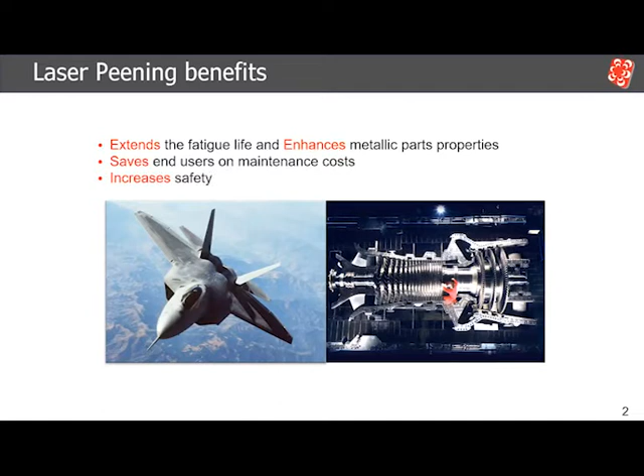So today in my talk, I will start with explaining what the materials team at LSP Technologies does, all the cool stuff we work on. Then I will move on and explain the basics of the laser peening process. I know a lot of people come from different backgrounds, so I wanted to have the same foundation for everyone moving forward.

Then I will move to the core of this presentation, which is the material properties enhancement, and digging into the technical basis of how we're getting that material enhancement from laser peening. I will end with quick closing notes and, of course, open the floor for your questions.

So starting with the material group at LSP Technologies, as Jeff explained, we've been working on a lot of projects around the world, and one of the projects is delivering laser peening systems, as you can see here, to China, Germany, and again back to China, and moving forward, hopefully in Russia and other countries.

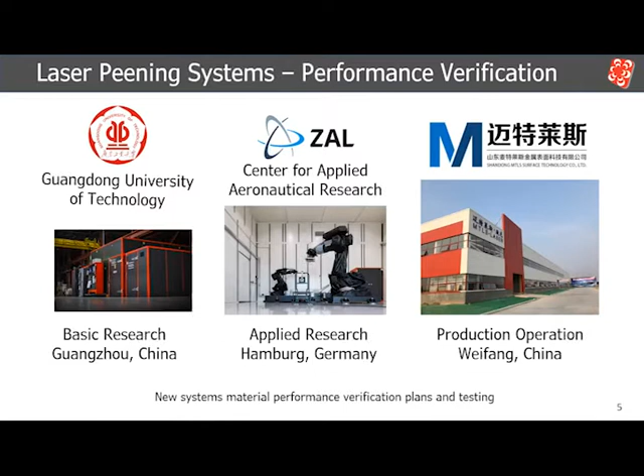The materials team responsibility when it comes to laser peening systems, to our Procudo 200 laser peening system, is ensuring the performance of that system, making sure all our systems are up to performance and meet all the requirements and are able to deliver the best laser peening performance from our processing.

The second task that the materials research group does is, with all the new expansion of our projects and going to applications pushing the boundaries of laser peening, as Dominica explained and others will be explaining in the next few talks, the materials team's responsibility is to work with our engineering groups to ensure we are supporting all the new innovation, all the new designs, and making sure all these new products that we're delivering actually meet their customer requirements and deliver the best laser peening process to these new applications.

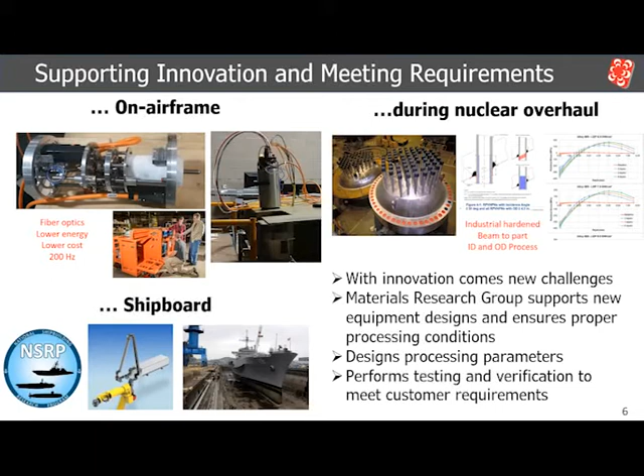Here at Dublin, we have our application development and production cell. On the application development, I'll explain a bit more about that process in the next slide, our duty is to interact with the customer, understand their problems, design laser peening solutions, and make sure to have proper processing to prove the benefits of laser peening.

On the production side, once they're happy and they want to have production, our goal is to identify the process optimization and boundaries for the process. And from there on is to ensure the quality assurance that every part that we're processing meets the requirements needed.

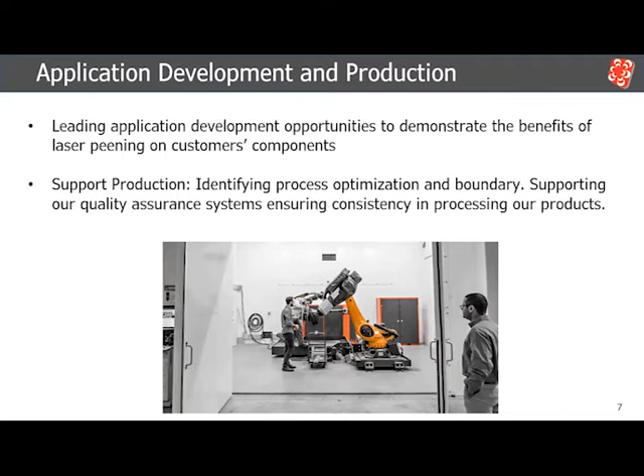Briefly about our development program for new applications, David Lahrman will be explaining and giving a lot of examples about this topic in his talk this afternoon at 4:25, titled The Path to Production.

The process mainly starts with actually understanding what the problem is. Laser peening is not a broad processing technology, meaning we need to know where the problem is in order to design a solution for that problem. That comes from learning as much as possible from the customer around the location of the failures, the type of the failures, the stresses, the environment being experienced by that component.

From there on, we move to our modeling part. Stan Bovid, Director of Materials Research, will have a talk around the modeling and all our work here at LSP Technologies. We use the modeling to optimize and tune down the number of parameters that we want to test to get the most optimum laser peening conditions for this part.

From there on, it's more of testing and verification. Testing can be done on samples or sample coupons, or on a small set of parts. Once the confidence is there and the customer is happy with the results that they received, that's when we move to production. And at that point, as I said, it's about ensuring that we get the best processing for each of the parts being laser peened.

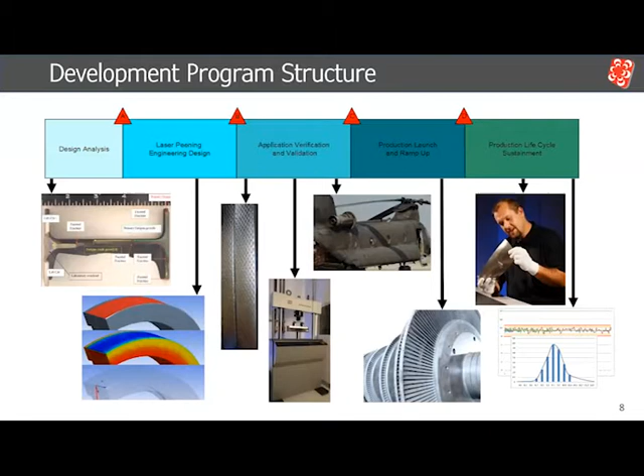So the final task that I want to talk about that the materials team does is research and development. We have a lot of topics that we investigate. The first one is pushing the boundaries of the laser peening process. As Alan showed, they have been doing science around laser interaction with materials since the 60s and 70s. But there's still a lot to push that technology forward. Stan Bovid, Director of Materials Research, recently published two papers linked to this.

The second type of research and development we do is developing physics-based, experimentally verified modeling capabilities. Stan, tomorrow at 1 p.m., will be presenting more about this topic.

The third research and development topic we work on is new applications. Jeff explained a bit about additive manufacturing and other applications he's excited about. Tomorrow at 2:30 p.m. Eastern Standard Time, I'll be giving an overview of laser peening for additive manufacturing.

So these are a few highlights of the talks and the research and work that the materials team does here at LSP Technologies. Now moving to the part where I will give a brief introduction to laser peening for the general audience.

In laser peening, we use a pulsed laser that interacts with the surface of the material, generating a plasma. We use a transparent overlay to confine that plasma. It's considered transparent since the laser passes through it without losing too much energy. While it confines the plasma, it pushes the energy from the plasma into the material, creating a shock wave. That shock wave generates the compressive residual stresses I'll be talking extensively about today.

One optional overlay is the opaque overlay. Historically, a lot of applications were around titanium, and opaque overlays are used to prevent plasma interaction with the material. For titanium, that interaction gives rise to alpha case, which is detrimental for the process. That said, most of our processing no longer includes any opaque overlays except for titanium.

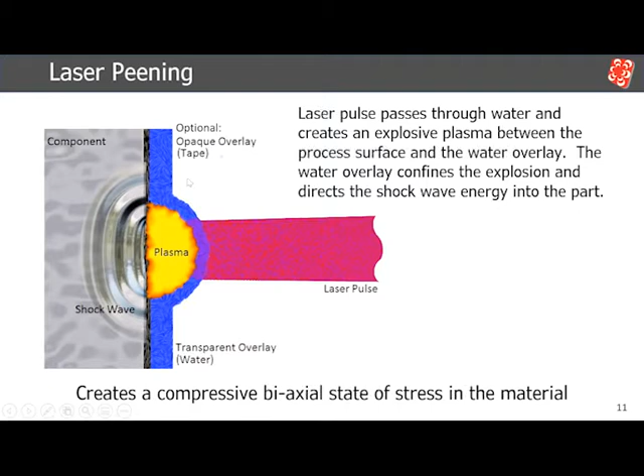So now we have a plasma at the surface that created a shock wave. When it propagates into the material, at the start you have the highest peak pressure, and that peak pressure needs to be higher than your dynamic yield strength, also called the Hugoniot elastic limit. As long as your peak pressure is higher than that limit, you will be generating plastic deformation. As the wave propagates into the material, it dampens, meaning you're losing peak pressure.

So as it goes into the material, that peak pressure keeps going lower and lower until you go below the Hugoniot elastic limit, and then you'll no longer generate plastic deformations. So now you're generating plastic deformation, and actually it's a gradient of plastic deformation up to a specific depth of effect.

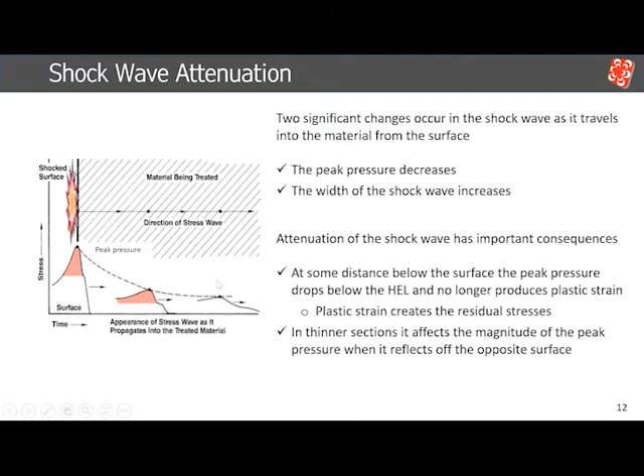So let's take that concept. We applied laser peening, deforming the part on the surface of the material up to a specific depth, and now we're putting that deformed area into the material. So we're pushing a plastically deformed material into the existing matrix. The natural reaction for the surrounding material is to elastically respond, trying to push back that deformation. That's what gives rise to the elastic compressive residual stresses from the laser peening process.

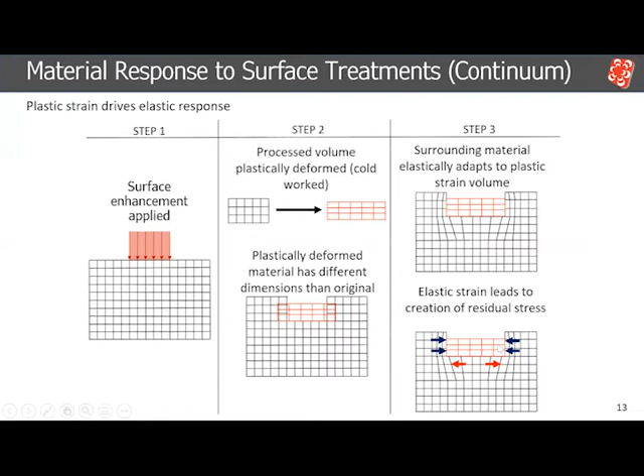So now how can we control these compressive stresses? In laser peening, we have full control over the laser parameters: how much energy per pulse we generate, what's the duration of that pulse, measured as full width half max. The final parameter is the spot area, meaning the area of interaction of the laser on the material. All these parameters combine into one variable called power density. In easy terms, power density is how hard I'm hitting the material.

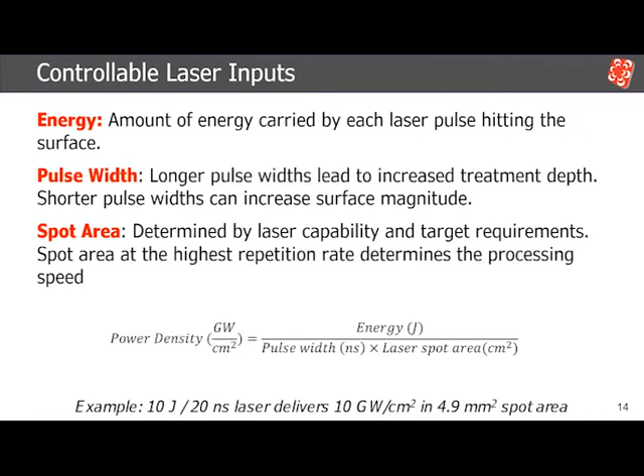A lot of research historically, and even recent work by Stan, has shown that power density is directly linked to peak pressure, meaning the higher power density you're using, the higher depth of residual stresses you're achieving, and vice versa. So we have the ability to control the residual stress profile needed to get the best processing.

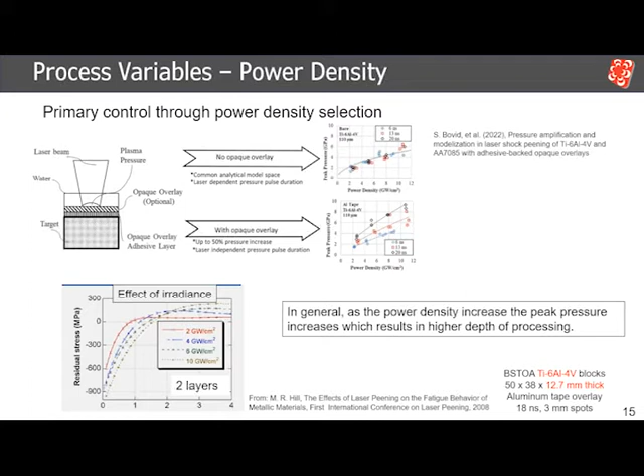So the power density is the main parameter that we control to process different types of materials. The second variable we control is called layers, overlap, coverage, or pulse density - it denotes how many pulses or what configuration of pulses we're placing on a surface. There's a lot of terminology among different groups. The main goal is, generally speaking, the higher number of layers or pulses you place on the surface, the more added benefit on the depth of compressive stresses, up to a point of diminishing returns.

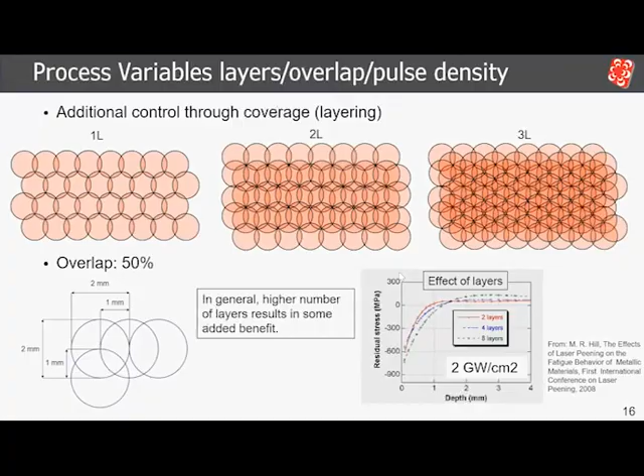With that being said, let's move to the core of this presentation. We're going to talk about material properties enhancement from laser peening. The goal here is to give the technical basis of how we're achieving these improvements.

The first question I usually get from any customer is, does laser peening work on my specific material or metal alloy? The answer is simply yes. The main difference when laser peening different materials is what power density I'm using. Higher strength materials require higher power density - since it's higher strength, we need to hit it harder to get the compressive stresses into the material.

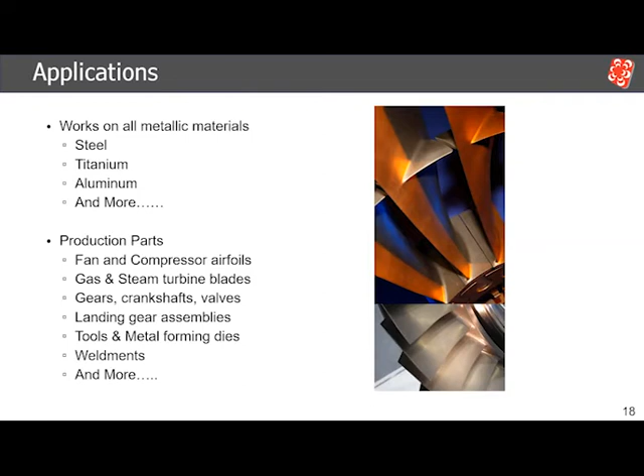We have the ability to model the laser peening process of these components. So when a customer brings in any part facing failures or needing fatigue or life enhancement in general, we can take that 3D model and apply a laser peening process modeling on top of it.

Stan, tomorrow at 1pm, is going to explain more about our ability to model different parts. We can predict the residual stresses that come out of the laser peening process, and we can estimate how much life improvement comes from the laser peening process.

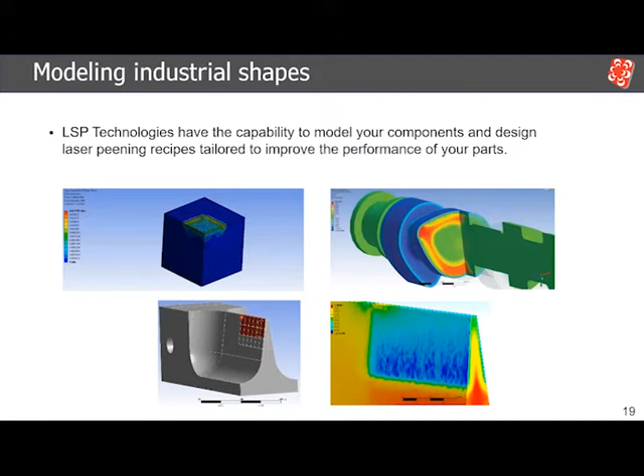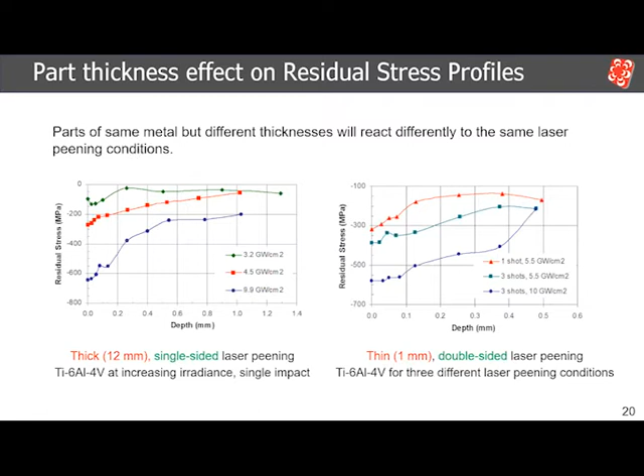Our modeling capabilities are supported by a large library of residual stress data that we have for different peening processes on different materials, with different thicknesses and geometries. We have a large material database that our models use to build and verify until we reach a model we're happy with, and then we apply that specific model to a complicated geometry, which helps us optimize our laser peening process.

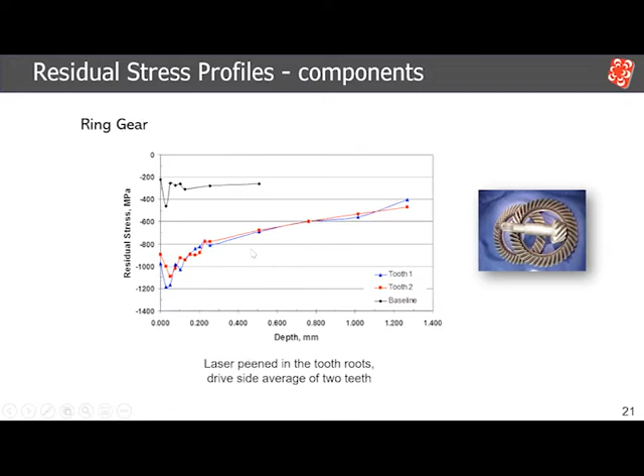After that, it becomes a matter of experimental verification of the results generated by the model. So we do actual residual stress measurement to verify the simulation results.

I did show a bit of residual stress data and didn't explain if these are good or bad. Historically, as with any other mechanical surface treatment, a lot of the original data is compared to shot peening, the most commonly used surface treatment in the industry. Historically, laser peening was used either in conjunction with shot peening, or in applications where shot peening provides very shallow residual stresses and you need the added benefit from laser peening. So in most applications, historically, laser peening was used due to the higher depth of compressive stresses it can generate.

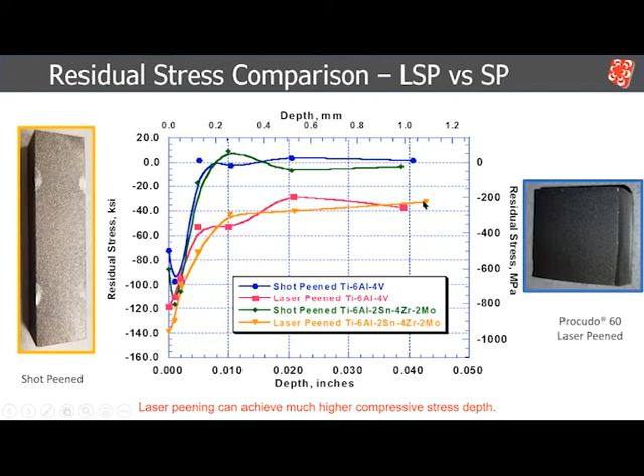More recently, because of improvements in laser technology, we're able to reach much higher repetition rates and get much higher throughput from the process. Now laser peening is actually being investigated as a replacement for shot peening. The goal isn't to give higher depth of residual stresses, although we could - it's for the long list of benefits laser peening has over shot peening, namely controllability, no need for masking, and other characteristics you can see in this slide.

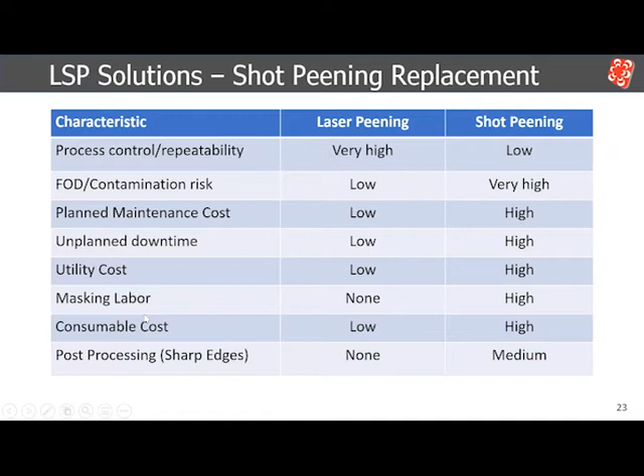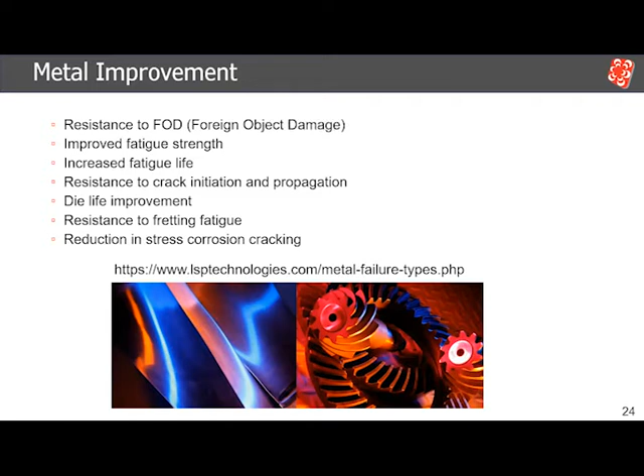Now moving into the actual material properties enhancement - here is a short list of the most common metal enhancements we mainly work on. Most of the problems our customers see are related to foreign object damage, similar to the first industrial application of laser peening. It's linked to fatigue life enhancement, fatigue strength, resistance to crack initiation and propagation. I'll explain a bit about die life improvement, resistance to fretting fatigue, and the last example is around stress corrosion cracking - a topic with new applications, and some even old applications.

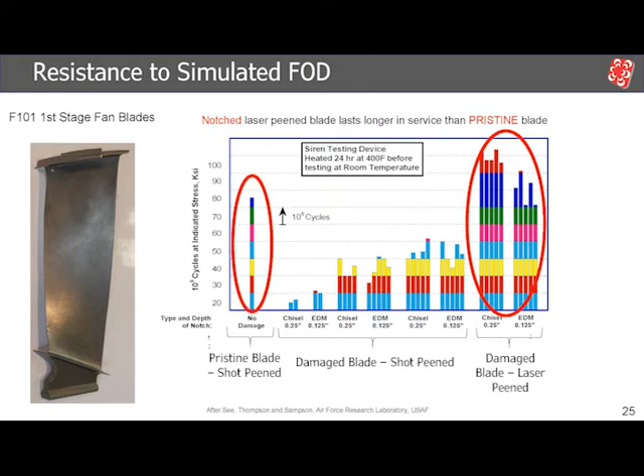That's where laser peening was investigated, as you can see here. Even the notched blade was able to perform equivalent or even better than the pristine condition of the blade.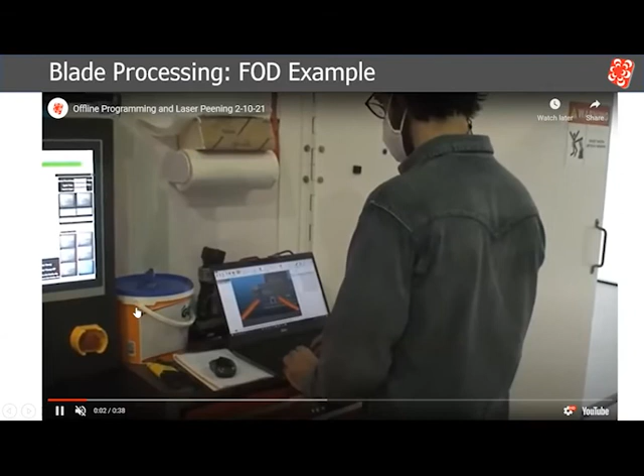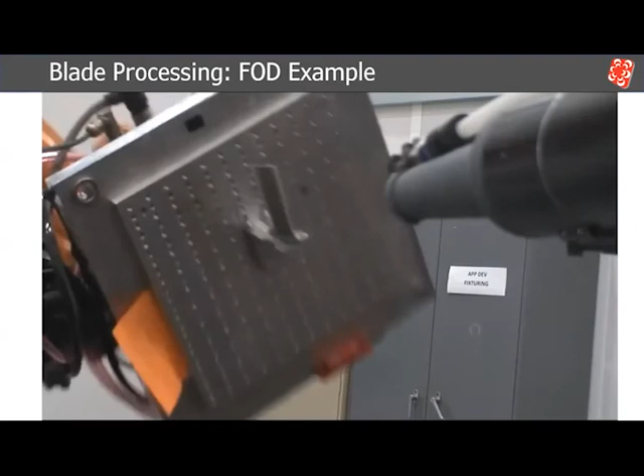So here is a video showing an example of laser peening our blades. Here at LSP Technologies, we benefit from offline programming. As you can see here, we do have programming capabilities to program the cell and make sure we have everything set up to reduce actual cell time.

Here you can see a demonstration, just a demo, for laser peening a blade in our cell. You can see the intricate robot motion in order to laser peen that leading edge of the blade.

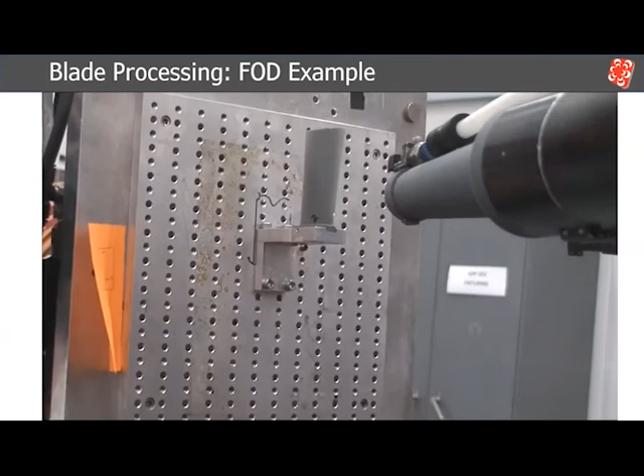Okay, so let's get a bit technical now. How does laser peening improve the fatigue life of components? I'm going to give a simple example from an arresting hook.

The arresting hook here is subjected to a bending stress, so you have the highest bending stress at the surface of the hook. As you start going into the material, into the hook, because of the bending stresses, they start going down linearly. Two surface treatments were investigated here.

You have laser peening and you have shot peening. A very important aspect of how to quantify the benefit from a surface treatment that generates compressive stresses is what's called superimposition. Simply speaking, you take the tensile stresses being applied minus the compressive stresses generated from the surface treatment. Using that concept, you can see two lines, one for shot peening and one for laser peening.

These are the actual stresses being experienced by the material. In shot peening, you are able to drop the magnitude at the surface, but because of the shallower depth, the material is still experiencing a stress level above 300 KSI just below the surface.

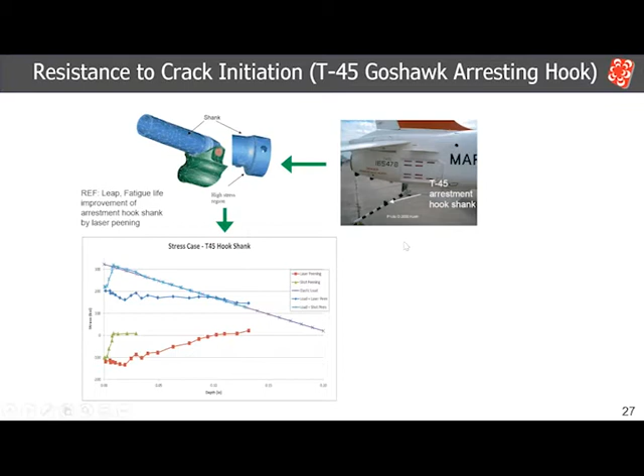So what does that mean for fatigue life? Let's mainly focus on the crack initiation phase. In this graph here, you can see this is the baseline. Shot peening, because it dropped the magnitude at the surface and lowered the magnitude in general, was able to get that benefit, and also pushed it from the surface to a lower subsurface location.

In the case of laser peening, because the material was now only experiencing 200 megapascal, or 200 KSI or lower, that's where the majority of that benefit and the fatigue life occurs. So long story short, the benefit from laser peening is generating compressive stresses that counteract the applied tensile stresses, so the actual material is experiencing a lower amount of net stress or total stress.

A more common way of representing fatigue life data is through SN curves. You can see the same pattern: we're trying shot peening, we're trying laser peening, and they're giving better results. Laser peening is generating a higher amount of improvement.

There are two ways of looking at these life improvements when you're looking at this SN curve. You can take a fixed stress, let's say around 260 megapascal. You can see the baseline is around 50,000 cycles, shot peening is around 100,000 cycles, and laser peening is at around 300,000 cycles.

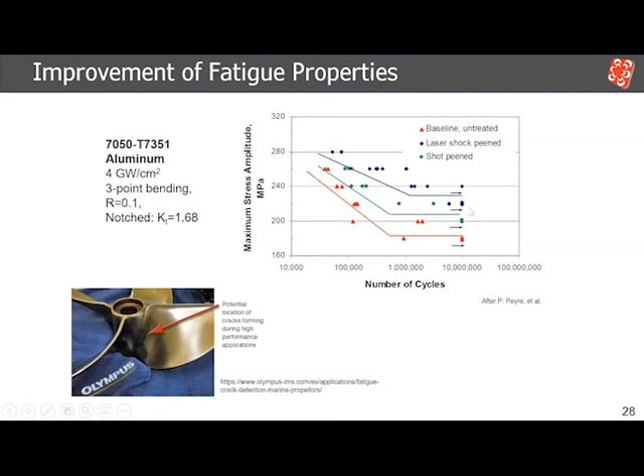So the compressive stresses generated from the laser peening process, or from the surface treatment, again counteract your applied tensile stresses, pushing your entire SN curve up by lowering the actual net stresses experienced by the material. So the endurance limit is no longer down here at 180 or so—the compressive stresses are counteracting that stress and pushing your endurance strength up to that 220 megapascal.

This study, also done on aluminum, separated the two aspects of fatigue life: the fatigue crack initiation and the fatigue crack propagation aspects. The majority of the life, as you can see in this graph, comes from the crack initiation. With laser peening, the highest benefit you get is from the crack initiation.

Looking at the same stress level I gave as an example, the baseline is around 50,000 cycles. Shot peening was able to push it to 100,000 cycles, whereas laser peening was able to push it to 300,000 cycles. The majority of that improvement lies in the ability to delay crack initiation. But if you also focus on the crack propagation side, laser peening was able to delay that as well.

I know Mike Fitzpatrick has a talk tomorrow at 10:50 Eastern Standard Time about designing laser peening patterns to delay that crack propagation.

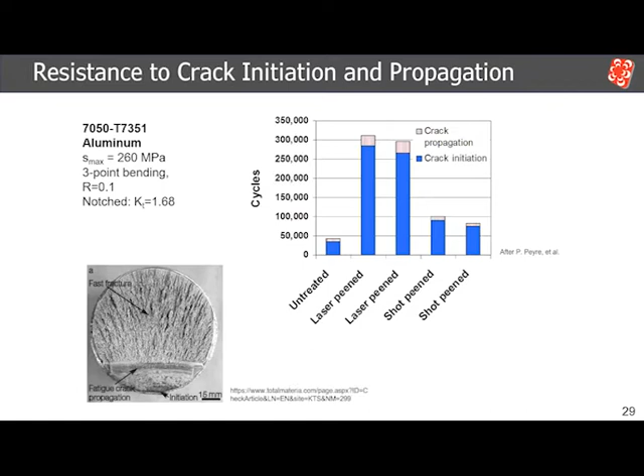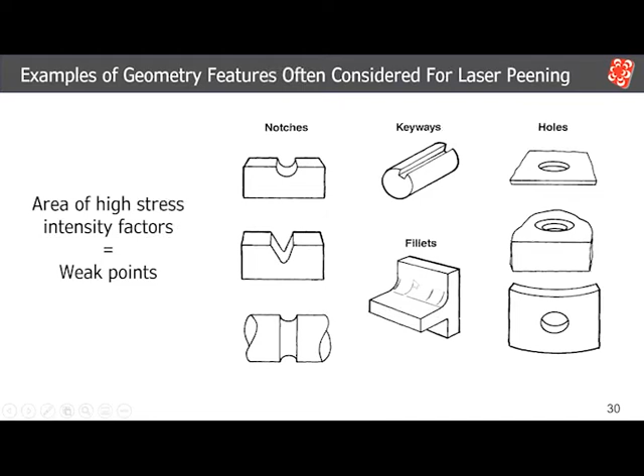In general, for industrial applications and parts, a lot of the parts we receive suffer from the same problems: features with a high stress intensity factor. Examples are notches, fillets, and holes. These high stress intensity factor locations are the weak points in the component, and applying tensile stresses is how you fail it, causing the fatigue crack to start and propagate.

As an example here, for any component we receive, whatever the geometry, we use our ability to model the part and generate programs that can process it before it even goes into the cell. That allows us to design programs and reduces downtime for the cell.

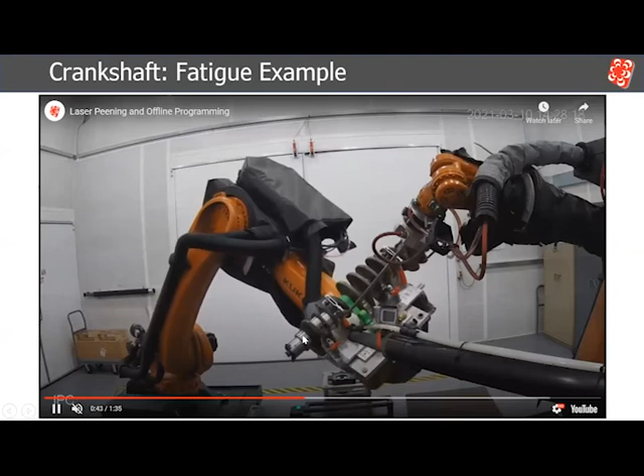Here in this application we're looking at a crankshaft. Crankshafts have both holes for the oil and fillets between the different features. In this video you can see we're laser peening the hole feature. To improve the full life of the component, you need to laser peen the most critical areas with the highest stress factors, and in this example that's a combination of laser peening the fillets and the holes.

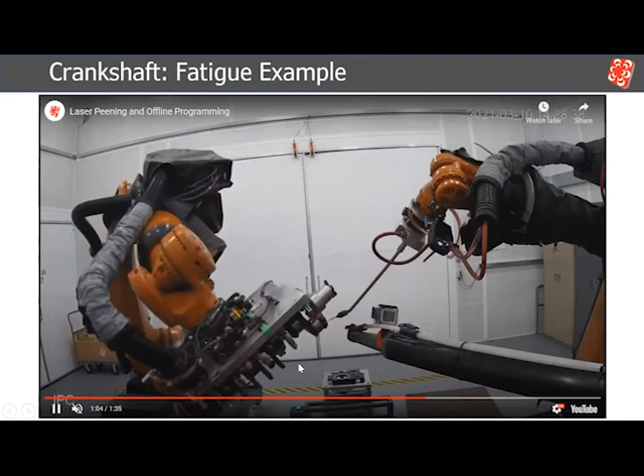Let's go back a step. I explained the improvement we got from foreign object damage, but not how we got that improvement. Simply put, foreign object damage is nothing more than notching your blade, and a notch is a location of high stress intensity factor — the weak point where a lot of cracks are going to initiate and propagate.

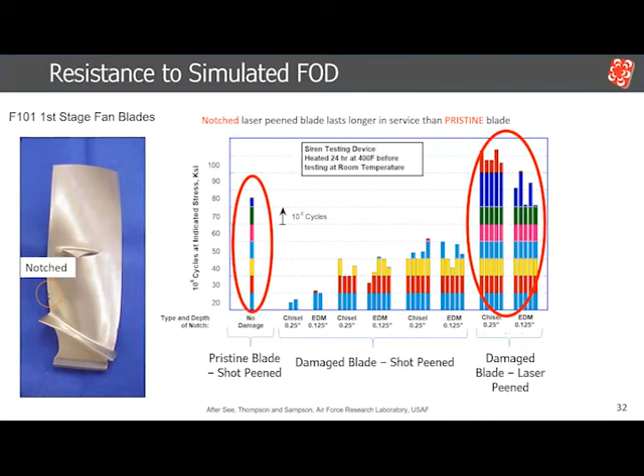The fact that we're generating compressive stresses delays both crack initiation and crack propagation, as I showed in the previous example. This is how the first application of laser peening was able to improve the life of these blades. So again, simply put, foreign object damage is a notch, a high stress intensity factor location that goes through crack initiation and propagation. Laser peening, by generating compressive stresses, delays both of these processes, improving the total life of any component.

On the same theme of fatigue life enhancement, a regular component we laser peen is the Pilger die. These dies mainly experience mechanical stresses, and a study with Sandvik previously showed that laser peening was able to improve the life of these dies by around 3 times. Looking deeper into this application, the majority of failures and the highest stress location is in that groove, where the crack initiates and propagates.

In a similar concept, laser peening of dies, which are very high strength material, generates really high compressive stresses. These high compressive stresses counteract the stresses experienced by the dies, improving their life by 3 times.

Something worth noting here: the best benefit isn't just the fatigue life improvement of these dies, but the fact that if one of these dies fails, you have to restack the entire rack of dies — taking everything out and reassembling it — which puts a lot of maintenance time and downtime into processing.

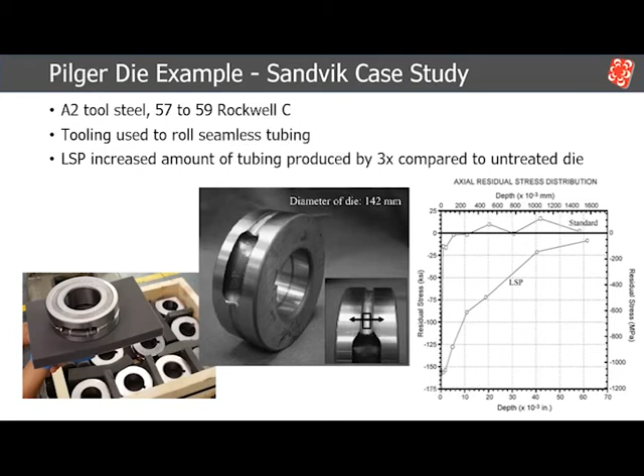The final type of fatigue I want to talk about today is fretting fatigue. Alan explained that the first actual mechanical testing results and benefits of laser peening were around fretting. Fretting occurs when you have reciprocating frictional contact - two things rubbing on each other, creating frictional stresses and crack initiation, which propagates at a later time. In a similar manner, you're creating compressive stresses by laser peening. These compressive stresses counteract the applied tensile stresses from this fretting fatigue.

You can see that laser peening is able to generate a life improvement up to 10 times. But moreover, because you're generating compressive stresses, you're creating an area in this curve where failure is no longer generated. It's kind of a knee curve, similar to a lot of the SN curves for different materials. The reasoning here is below a specific stress, the compressive stresses you're generating can fully protect the material from crack initiation in the first place, giving the part almost a full life without failures up to the testing endurance limit.

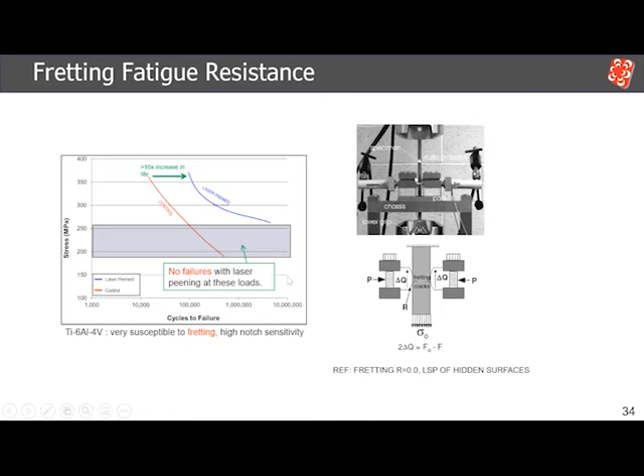Now moving away from fatigue and talking about a very common metal failure that we work on: stress corrosion cracking. In order to get stress corrosion cracking, you have 3 factors that need to occur at the same time. You need high tensile stresses, you need a corrosive environment, and you need a susceptible material.

So let's talk about this example. A common way of testing stress corrosion cracking is using C rings or U bends. In this specific example, we have susceptible material, which is 300M steel, and we're placing it in a corrosive environment, which is sodium chloride. We're applying tensile stresses, 1240 megapascal stress. So we have all 3 conditions to cause stress corrosion cracking in this part.

So again, like a lot of the original data, laser peening and shot peening were investigated to improve the life of the baseline here - in this case, as machined. You can see the as-machined condition, the life from this testing was around 200 hours. Shot peening was able to generate an improvement, pushing the life of that sample up to 400 hours. Laser peening was able to run up to 1,500 hours without failures. So the testing was stopped after 1,500 hours and no failures were detected.

So moving on to the last slide, it's kind of my closing note, and the main focus here - I want to talk about how laser peening can be used to optimize future designs.

So the larger number of customers and applications we get are customers that already have problems in service. They have a component experiencing one of the problems I explained, so we need to go back and see how laser peening can help improve the life of these components that are already in service.

But a different approach that I've always advocated for, and we're seeing a lot of interest in, is actually using laser peening for future component design. A lot of designers now have the ability to do stress analysis and understand their high stress locations with predicted high intensity factors, so they already have the ability to predict any failures that are going to happen in their part.

Rather than complicating their manufacturing process or using a much more expensive alloy or different techniques to generate the part, they're actually looking at laser peening to enhance the part and only focus on the critical locations, giving them much higher flexibility in design, increasing efficiency, allowing them to use lighter or cheaper material and still get the same performance they're targeting, and even a bit more.

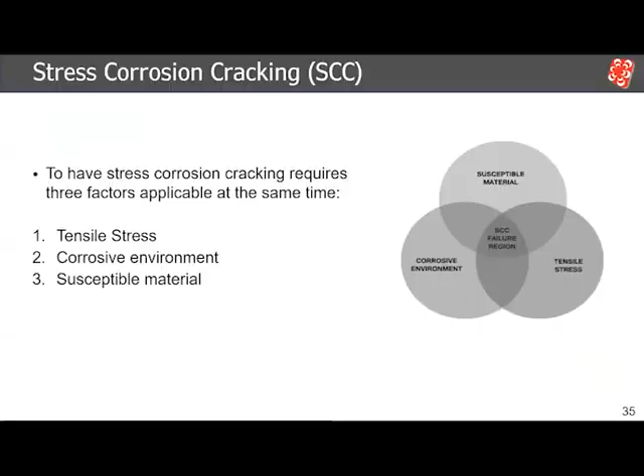Michael, thank you for your presentation, appreciate the information you showed us. We do have two questions from the audience, and I'll read these. Both are from James Smith. The first question pertains to an image, a video you provided on the blade. It says, in the example showing the laser peening of the blade, it looked to be in the vertical position. Also, did I not see a plasma? And the second part of that question, was a water layer present?

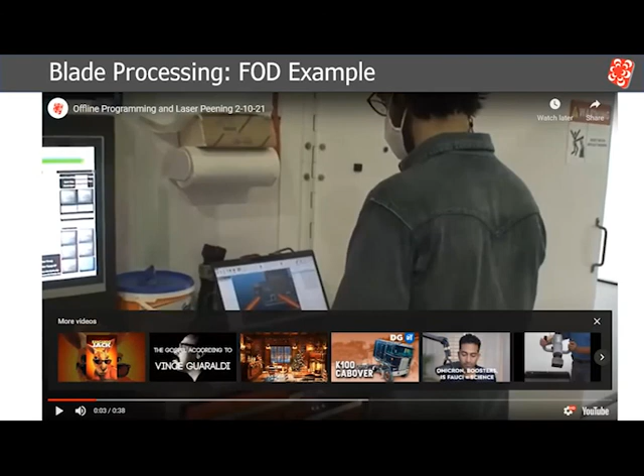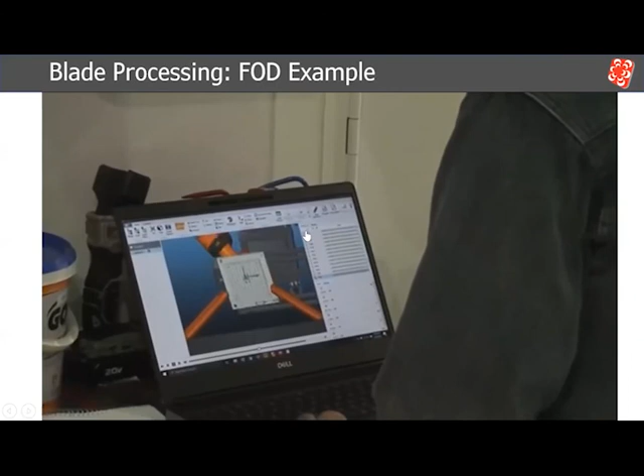I think prefacing what's going on in this particular video segment might help answer that question. Yes, as I explained while showing this video, it's actually a demo of the laser peening process. So as I explained, this was just a demo to show the process. In our processing, we go through an initial step of verifying our robot programming, so that was this step. Actually, you're seeing the laser hitting the surface without any water.

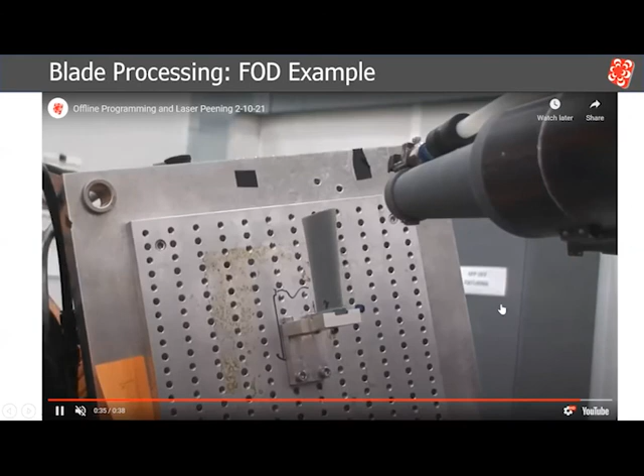If you don't confine the plasma, you will have very small explosions happening. So it's just a demonstration. And the second video that I presented actually showed an actual laser peening process, and I'll get to that one.

Hopefully it's a bit harder one to see, but you can see both of these features. We're generating a plasma, and you can see the water nozzle here, and I can zoom in - you can see the water dripping, that's how we're applying it. Since the laser peening is inside the hole, you can't actually see it, but there's usually a spark of light explosion generated from the plasma. I hope I answered that question.

I think you did. So basically what you're saying is that was a demo to set up the blade, to confirm processing and the area to be addressed, and it's a low energy setup for that particular configuration. And he responded yes.

The next question is also from James Smith. He says the plastic deformation generally causes microcracks. Do microcracks have a significant role in laser peening?

When we're laser peening, we do not see any microcracking. We're generating very low magnitudes of cold work in the material. So the cold work in the material is very localized, near-surface dimples, and I'm talking about a few micrometers in depth. The amount of cold work depends on how hard the material is - for example, for these dies, I'm expecting like 1% cold work or maybe even less.

So you're not damaging the material itself, but by using very low cold work in the process, you do not tend to see any microcracking from the process itself. So we're not generating cracking, so we're not having problems with the cracking itself.